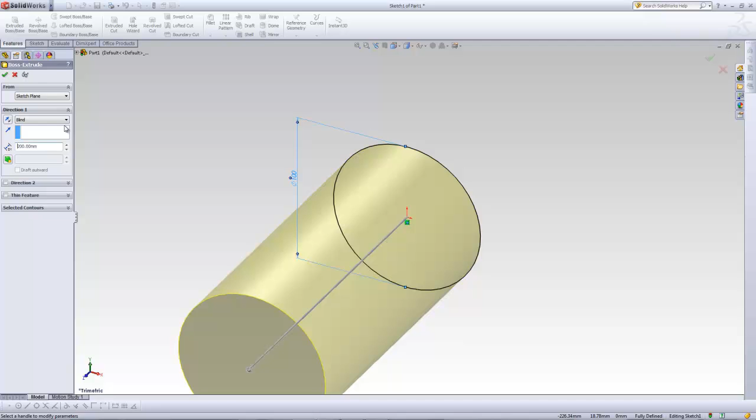We're going to make the diameter of this circle 100 millimeters. Once you're done with this, extrude this sketch 200 millimeters. Finally, you can save this part and rename it to shaft.

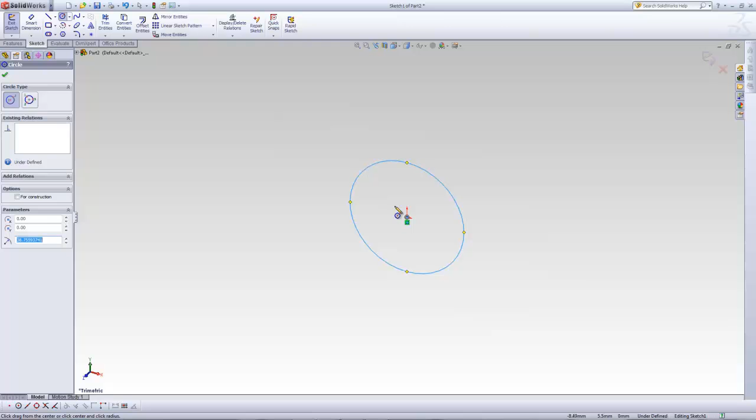Next, create another part and create the sketch in the front plane again. This sketch will be of the hollow cylinder. As such, create two circles and make the inner circle diameter 100 millimeters again.

Make the outer circle 120 millimeters. Once you're done with this, extrude it to 200 millimeters again and save it as cylinder.

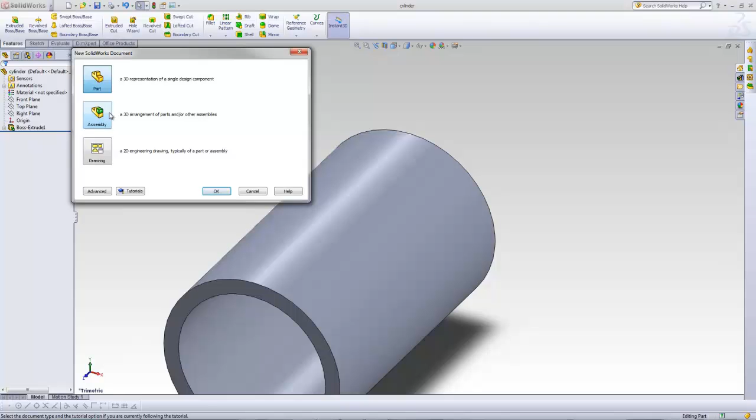Now to create the assembly, create a new SolidWorks document and select Assembly this time. On the left hand side of your screen you should see Begin Assembly. Over here you can insert any open parts you may have. Click on Cylinder and add it by left clicking.

Next, go to Insert Components on the Assembly tab and browse your computer to find the shaft. Insert the shaft and now we can begin mating the two parts.

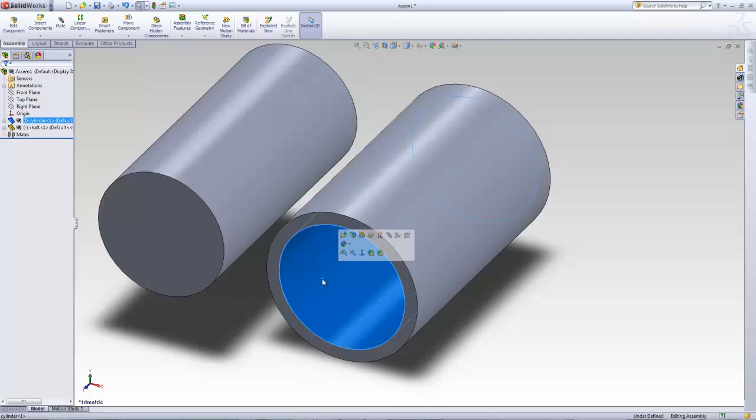Once the two parts have been inserted, select the inner diameter of the cylinder and the outer surface of the shaft and click on Mate. If you've forgotten how to select multiple surfaces in SolidWorks, all you have to do is left click on each surface while holding down the Control key.

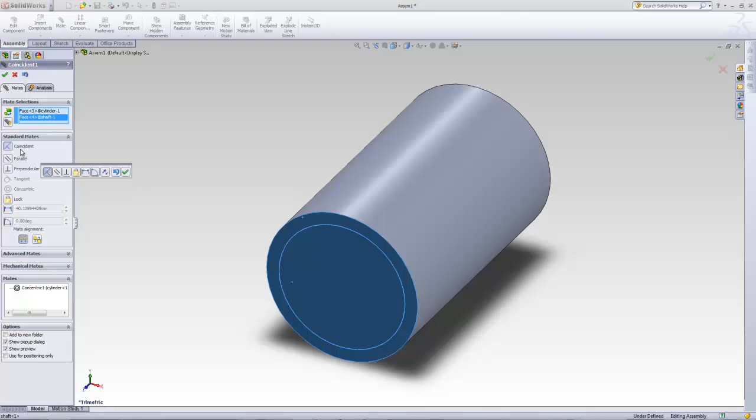Now by default the mating type will be concentric on the left hand side. This is correct. Next, select the two front surfaces of the parts. The default mating type in this case will be coincident. This is also correct. Now we can save this document as assembly.

Close this assembly and close the part. Now we can start by making the working drawing. Make a new SolidWorks document again, but this time select Drawing.

Once you've pressed OK, you'll see a pop-up appear asking you to select the standard sheet size. At this point in time, all you really have to use is the A3 ISO standard. You'll notice that the A4 standard shows a portrait orientation. The A3 uses landscape.

Notice also that once you've saved your drawing as a PDF, even if you're using the A3 standard sheet size, you can still print it onto A4 paper. Once you've selected A3, press OK.

Now at this point in time, you'll see on the left hand side the model view screen. In order to insert any of your parts into the working drawing, simply click on Browse and find your shaft assembly. Press Open. By default, SolidWorks will want you to add in the model views of the assembly part.

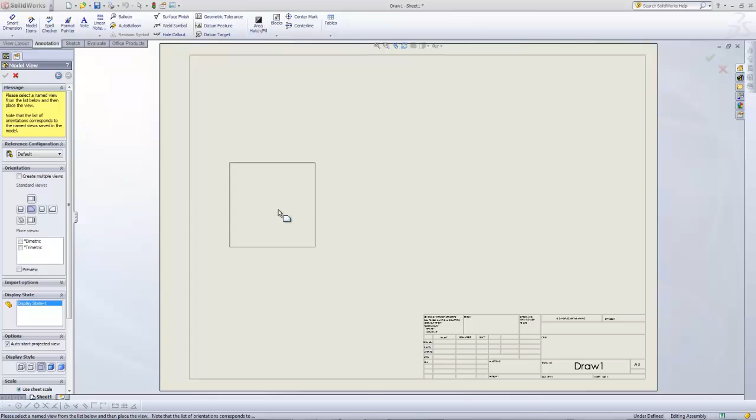If you were to left click right now, you would be adding in the front view. If you want to add in different views, you can see different views can be selected here: bottom, top, over here is left, but keep it to front for now.

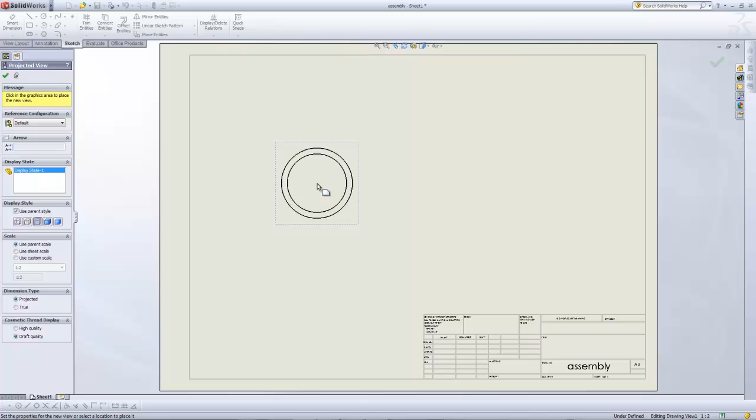With this front view selected, click somewhere on the sheet. You'll see the front view of your shaft assembly has been added. I will also place two additional views, which by default are projected from the first view, just to show you how to change views that you have already placed.

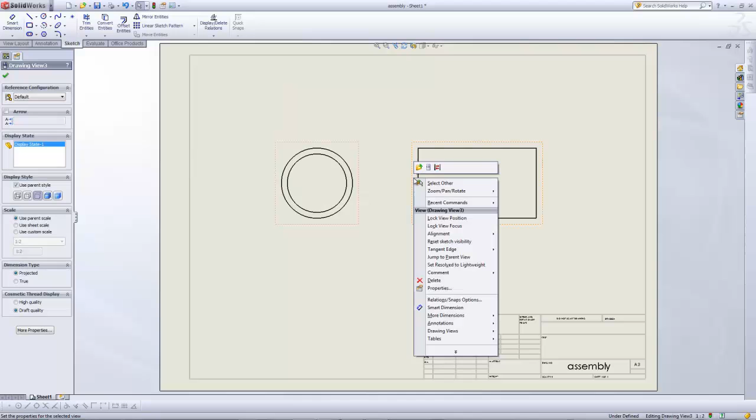To delete a view, simply select it and press Delete. You'll be asked for confirmation. Alternatively, you can right-click on the view and press Delete in the menu.

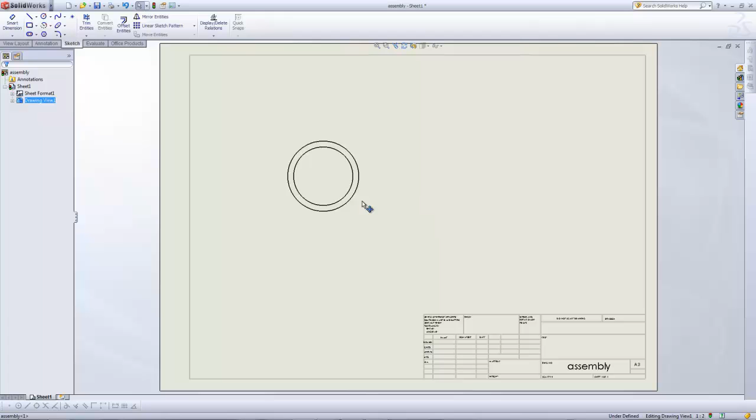Before proceeding, we're going to reposition the front view, just to show you how to do so. Once you mouse over the dotted line, your mouse cursor will change. Now if you hold in left click, you can drag it anywhere on the sheet. Place it somewhere so that you have space for dimensions that may be placed later.

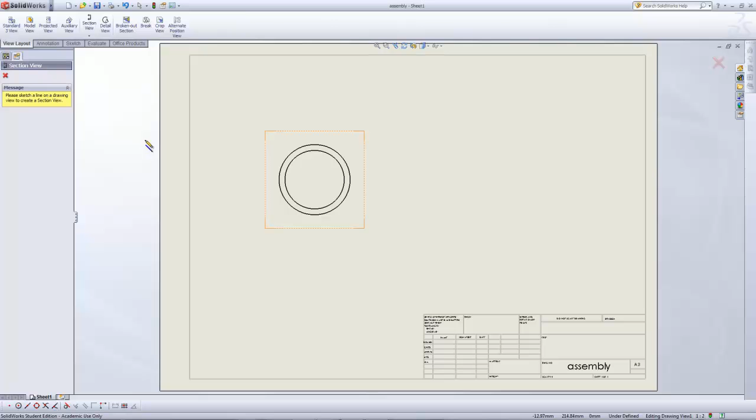For this working drawing, however, we're going to create a section view. To create the section view, make sure that the View Layout tab is selected. Now click on Section View. Your mouse pointer will now become a pencil, indicating you have to draw a section line.

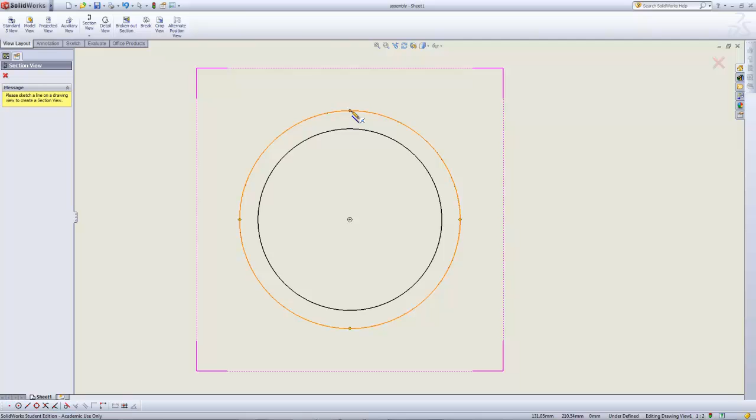In order to draw the section line, zoom in by scrolling down into your front view. We want to create the section line down the middle of the shaft, so simply move your mouse pointer over the outer diameter and you'll see the center points being highlighted. Once you find the center point at the top of the shaft, move the mouse above it and you can see the dotted line indicating it's vertical with the center line. Left click somewhere above the shaft.

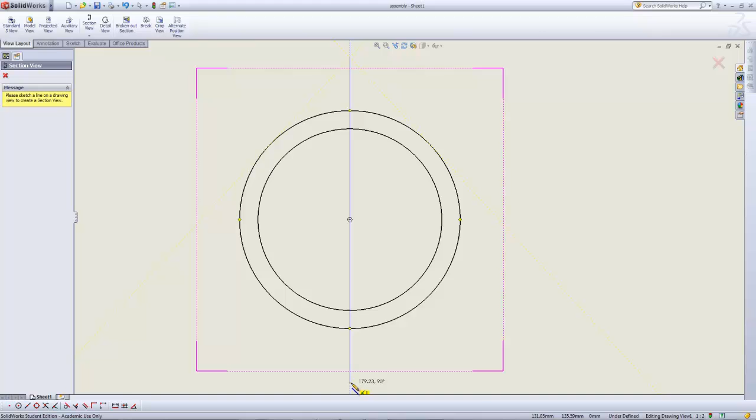At this point, move your mouse to the other side of the front view, and after making sure the line is vertical again, indicated by the 90 degrees showing up, click again to place the end point of the line.

Now you will be given the choice to exclude components from the section. Remember about this when you are doing more advanced drawings. For the time being, make sure that auto hatching is selected, and also make sure that the fasteners are excluded, as is required by the ISO standards.

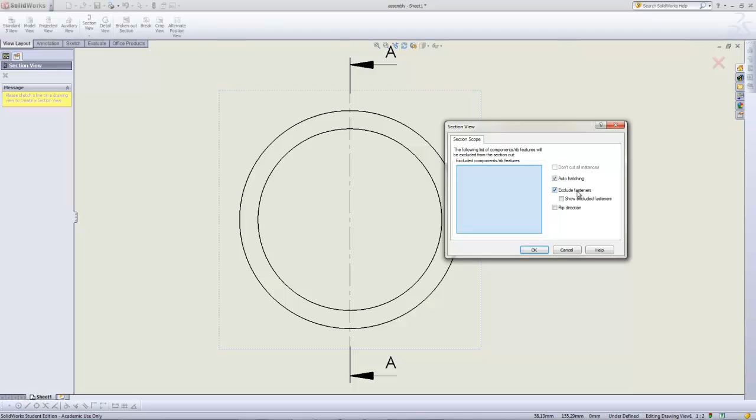Now press OK. Without clicking, zoom out so that you can see the entire sheet. You can now place the section view. Place it to the side of your front view, making sure to leave sufficient space for dimensions. Notice that the auto hatching feature differentiates the different parts inside your assembly automatically.

Now on the left hand side of your screen you should see options for the section. Let's look at some of these options. At the top you can flip the direction of your section view by selecting the flip direction box. You'll see the arrows have changed. You can't really notice a difference in this cylinder, however, due to symmetry.

Deselect it. You can also change the letter assigned to this section view. If you insert the letter B, you'll see it changes. Leave it at a capital A for the time being.

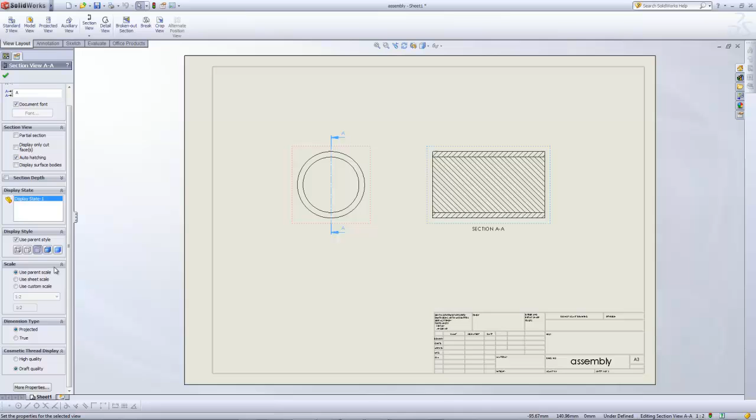Furthermore, if you scroll down, you can also select a custom scale for your section view. Leave it at the default 1:2 scale. So for the time being, click on the tick mark to indicate that the section view is correct.

Next, we will be adding in dimensions. To add in dimensions for the working drawings, click on the Annotations tab in the top left. After this, select the Smart Dimension button. You'll see that this feature works the exact same as the Smart Dimension tool used to create sketches.

For this assembly, we want to know what the overall dimensions are, as well as what kind of fit the two components have. For this example, we will assume a press fit.

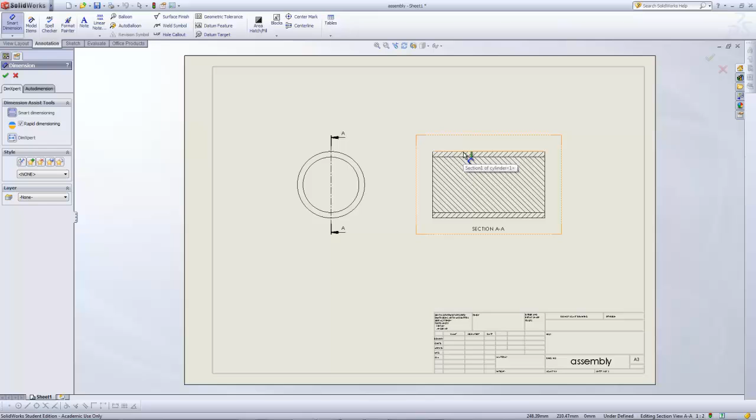First off, with Smart Dimensions selected, click on the top line on your section view. This will allow us to dimension the overall length of the assembly. Drag out the dimensions somewhere above your section view and left click to place it. Remember that dimensions on the assembly drawings are important. For instance, this dimension we placed just now could help an engineer to specify the proper packaging.

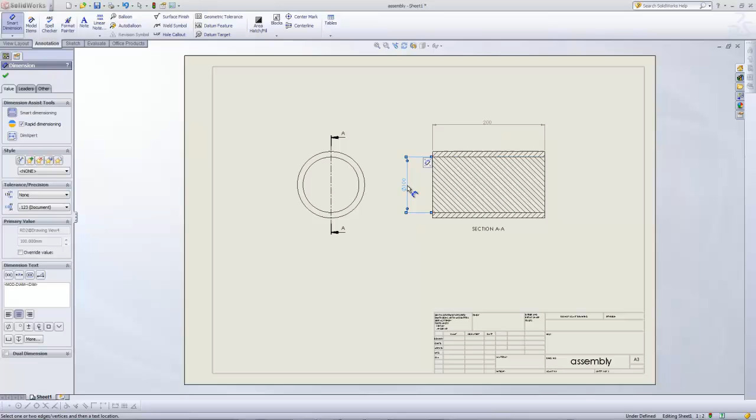Next, making sure Smart Dimension is still selected, click on the two lines that represent the inner diameter of the shaft, over here and over here. Now place this dimension somewhere to the left of the shaft. Do the same for the lines that represent the outer shaft diameter.